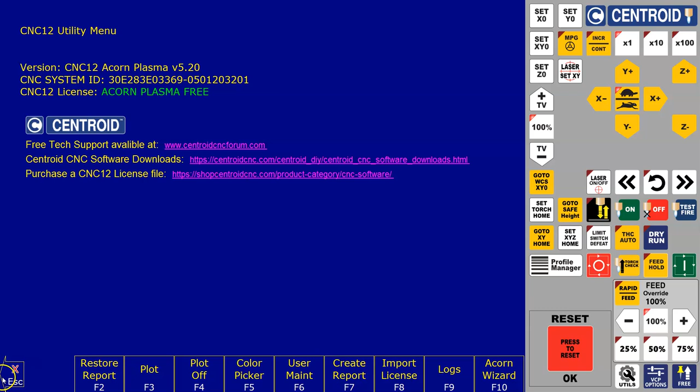These latest updates will be available in 5.2 or newer software versions. I'll go to my F7 utility menu. You can see I'm running Acorn Plasma 5.2, so this is CNC12 version 5.2. This is not only Acorn, but any CNC12 Plasma version will have this updated restart mode - that's Acorn, Acorn 6, Hickory. Anything CNC12 Plasma will have this updated restart mode. So let's get to it.

Let's go ahead and load our job. First job I'm going to run will be the Centroid Plasma logo, 20 inches by 4 inches.

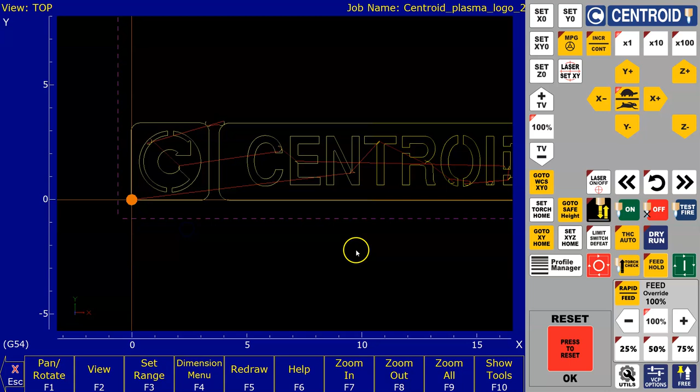We can check out the job in the F8 graph job menu. I can click and drag with the mouse, use the scroll wheel to zoom out. And what we see here is the purple dashed line are my soft limits.

So you could say that the soft limits are based off of my machine coordinate. And then we can see the orange crosshair is my actual torch location at the moment. I just set my work coordinate 0, so if I actually jog the torch off, we can see the work coordinate there. The work coordinate is the white crosshair, and that is where the job is based off of the work coordinate.

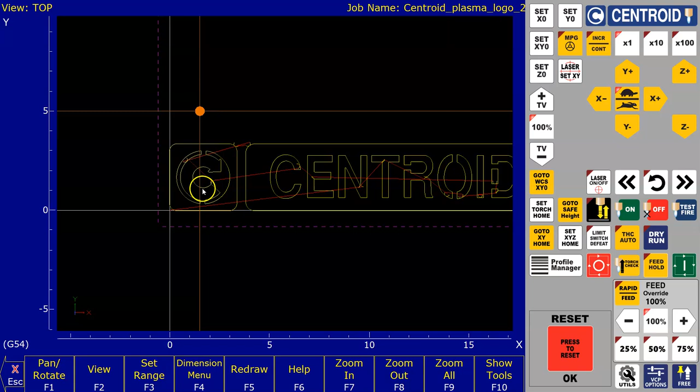So we can see our Centroid logo job there, and that's what we'll be testing and demonstrating the latest restart mode features with. So let's get to it.

First thing I'll show is, let's say you bring in a job and you just want to jump ahead, jump to a different part of a big nested job, and you just want to do a specific part in the job. What we can do is we can go directly into restart mode.

All we did was load our job, and we'll just press the center restart mode button. This is the restart mode button - when it's highlighted blue, that means you're in restart mode. And to get into restart mode, all we have to do is select this center restart mode button.

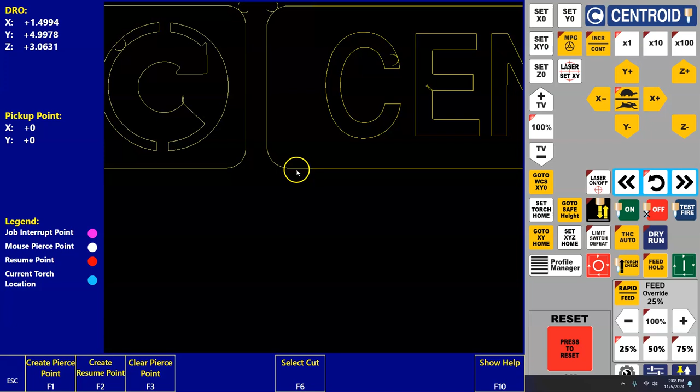Alright, so we're in restart mode. Mouse has the same control as the graph menu - I can click and drag, zoom in and out. This comes in handy for a big nested job; we can get right in on the part that we're looking for in the job.

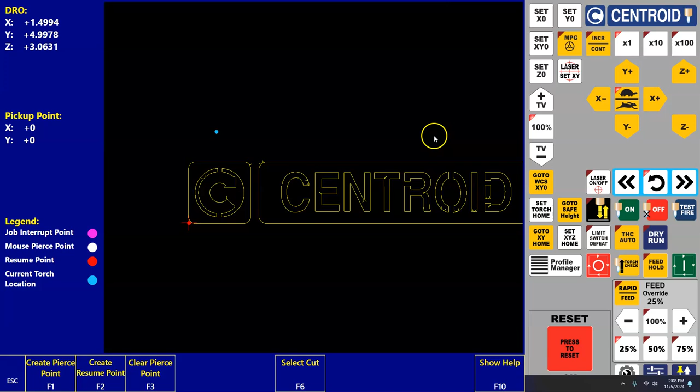And so we want to jump ahead, right? Let's say I'm not really worried about the Centroid part of this job, I just want the logo. So what I can do is I can press Select Cut, F6.

And what that does is any cut underneath the mouse, or closest to the mouse, will highlight white. And we can see that the different cuts in the logo are highlighting white.

And if I double click, a resume point will drop at the beginning of that cut, at the pierce point. So the resume point is the point at which we want to resume the job. And so we see I selected the outside of the cut - the red resume point drops at the pierce point of that cut.

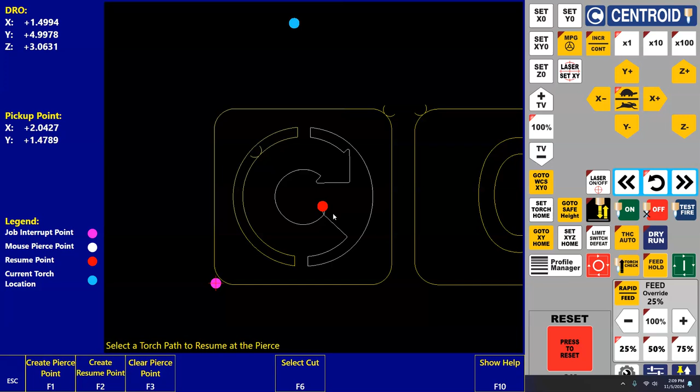Same for this side of the logo - resume point is dropping at the pierce point. And same for this side. So I'll just double click here, and let's say we just want to jump here in the job and start cutting this logo. All we have to do is press cycle start.

And there we go, we are running the job. So I'll bail out.

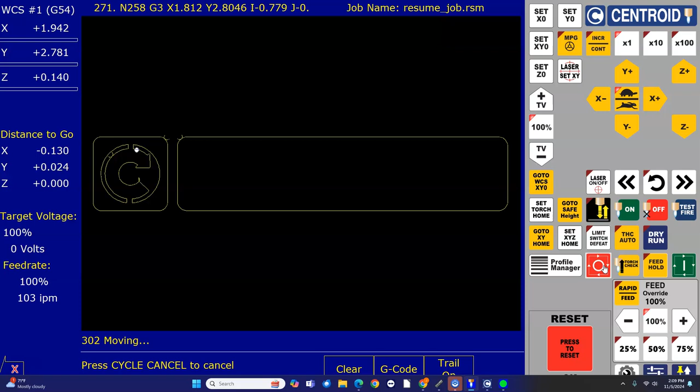I can go right back into restart mode. And the restart mode now, because we are actually running the job when I stop, it shows where we last interrupted the job, or where we stopped at.

The purple is the interruption point. So when I press cycle cancel, that was the purple dot when it dropped. And then it actually decelerated to a stop - the torch did, past the interruption point. So hence why the blue dot, which is our current torch location, kind of moved just past the interruption point.

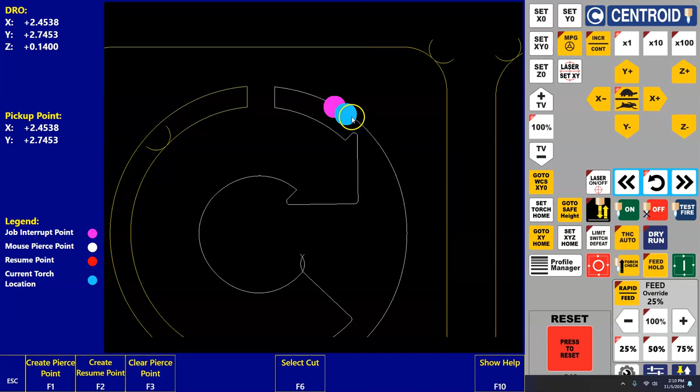So that means you can use restart mode even if you cycle cancel, something happens, bail out of the job, we can get right back into it and it remembers where we were last cutting at. So let's say we bailed out of the job for whatever reason, we're back in restart mode, and I do want to resume the job exactly where I pressed cycle cancel at when we were previously cutting.

So now we know we're in restart mode. We see the restart mode buttons are highlighted blue. You can also see those F commands in restart mode. I can now use the traverse button to traverse backwards.

So I'll click that. And actually my jog rate is extremely fast right now, so I can just turn down the feed rate. This is going to slow down the speed at which I'm traversing, which is based off of our jog rate. So I'll traverse the torch back forward to the interruption point.

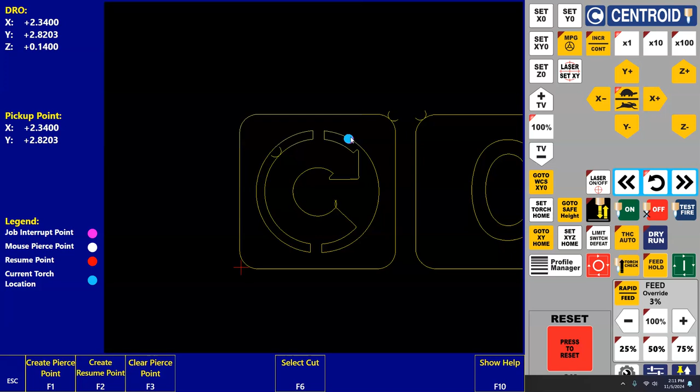And I'll get that blue dot pretty close to the interruption point. Let's just say I'm looking at the table. I see the torch is right above where I stopped cutting at and where I would like to resume cutting at on the torch path. So I'll just zoom in here.

Now what we want to do is I could just light the torch here and continue motion. That means it's going to light the torch at a stop and immediately start moving along the torch path, but it's going to be, of course, a slower feed rate, starting movement from a stop. And our kerf width might be a little bit bigger.

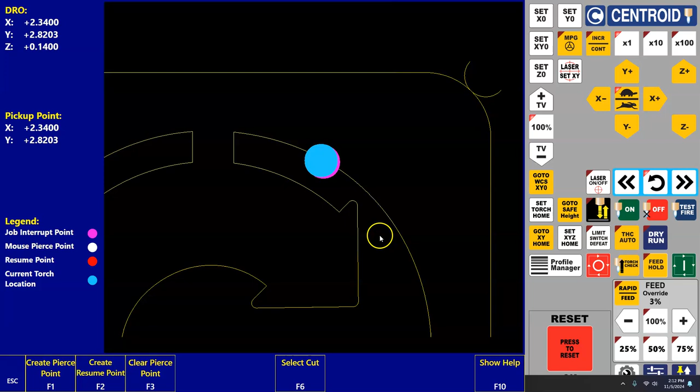One way we can solve that is by putting a lead in to resume the job, a lead in to build speed before the torch resumes on the cut path. So we've got a couple different ways of doing that. We can use the F command and just use the mouse for this. I'll demonstrate that.

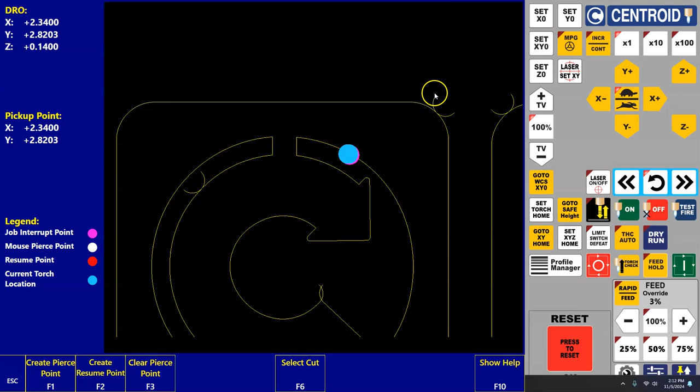So we want to put a resume point where our torch is. The resume point, just like before, where the resume point dropped at the pierce, we want to resume on the cut path right here. So we're going to put a resume point here.

So I'll select F2, create resume point. I'll double click right on the dot. And we can barely see, but under there is our resume point.

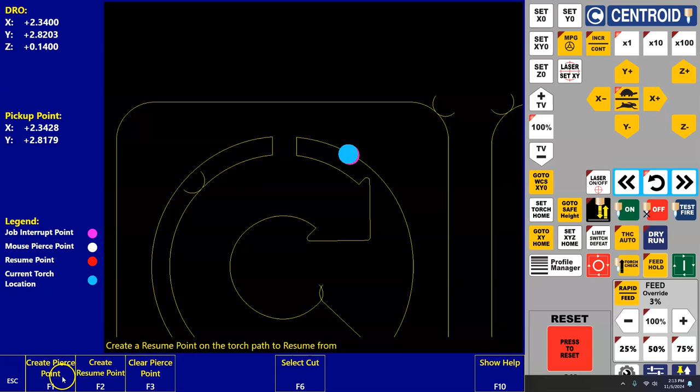And now let's select a pierce point. So I'll press F3, select pierce point. Oh, that's clear pierce point. F1, create pierce point. And I know I'm going clockwise direction, so I'm going to put my pierce right here in the scrap.

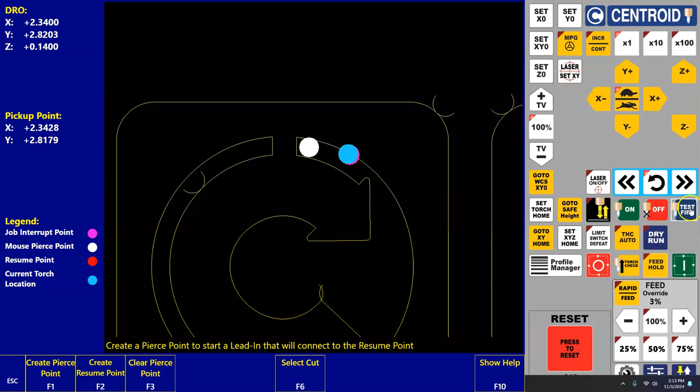So at the center of this white dot, the torch is going to pierce here and then make a straight line to our resume point, which we know and just put over here. So we can demonstrate that. I'll press cycle start. And there you can see the little flat of the lead in there before it re-enters on the resume.

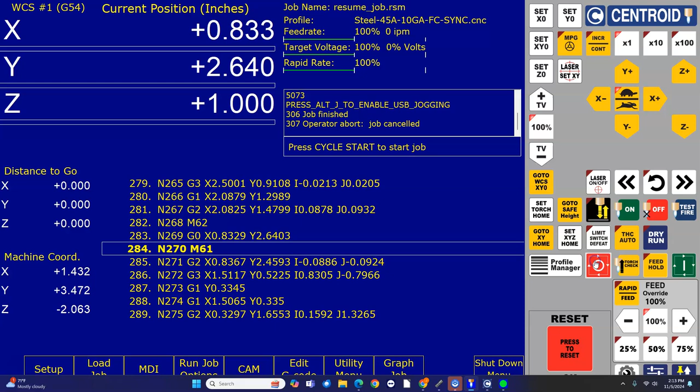So we're going to go right back into restart mode. Alright, so I interrupted that job in a rapid. It pretty much made it to the pierce of this next cut.

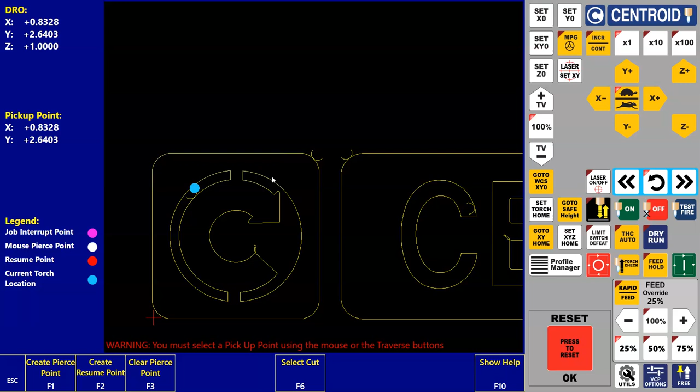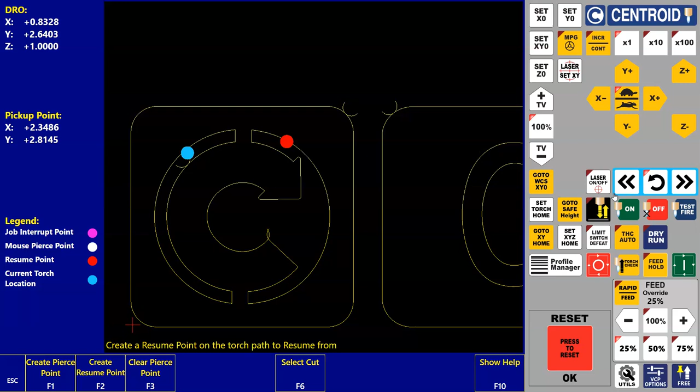But let's say we don't have the interruption point here. Let's say nothing happened since our last resume, and let's say I still interrupted over here. What I can do to actually move the torch back onto that torch path, instead of having to traverse, reverse, and go back to the end of this cut and then reverse back up, all I have to do is drop a resume point on the torch path over here and use the traverse buttons to then move the torch onto the torch path where the resume point was.

I'll move it a little bit further over. And so now we're kind of back on the torch path where our old resume point was and where we recovered last time.

But now I'm going to demonstrate a different way of recovering, and we're going to use the traverse buttons again. I'm going to slow that feed rate down and traverse to where I'd like to resume the job, which was right in here somewhere. Instead of dropping a resume point where I want to resume on the torch path and then creating a pierce point with the mouse, I'm going to just do that via jogging and the traverse buttons.

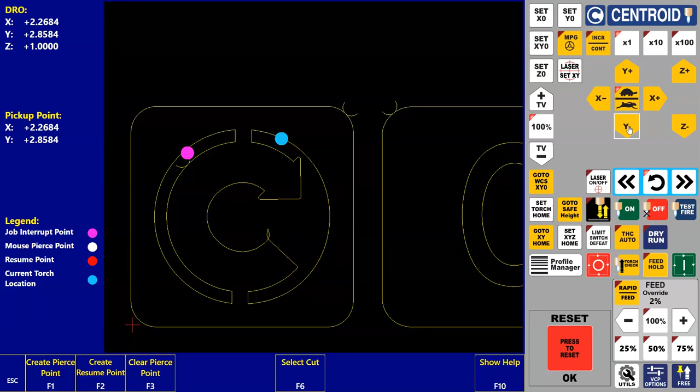So I've already moved the torch where I'd like to resume on the torch path. Now I'm going to create a lead-in. But to do that, all I need to do is jog the torch to where I would like the pierce to begin.

So as soon as I jog off the torch path, it's going to drop the resume point there. And now all I'm doing is jogging the torch to where I would like it to pierce and then resume the torch path at the resume point.

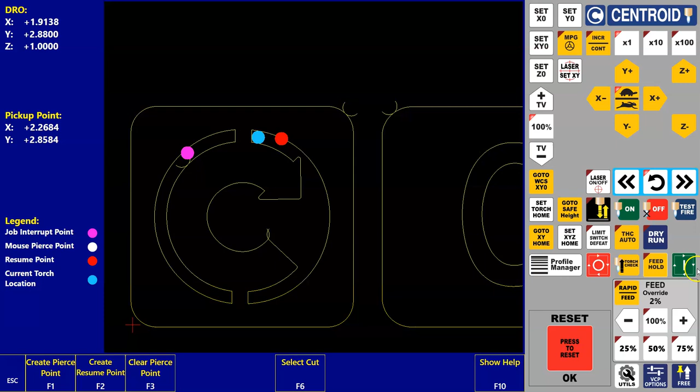So I'll put the torch right here where I would like it to pierce. It's going to connect straight to the resume point and continue on the torch path. All I have to do is press cycle start. And once again, there's our flat lead-in and resuming on the torch path.

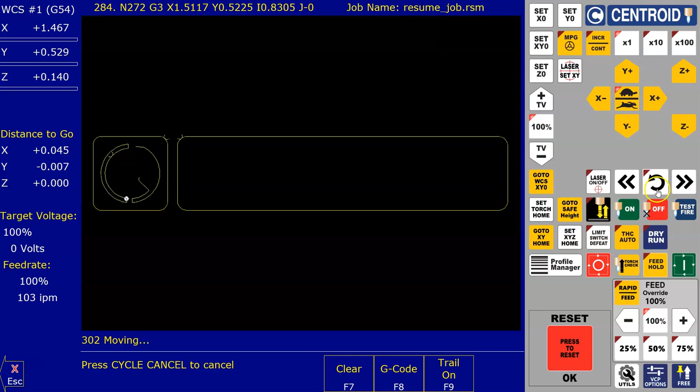So I'm going to demonstrate a interruption to the job by pressing cycle cancel. If you have an interruption to the job, say you had a flame out, your Hypertherm or your plasma cutter has an error, consumables, air pressure, whatever it is, maybe you had a tip up, a piece of metal came up and tripped the breakaway. When that job interruption happens, CNC12 immediately goes into restart mode.

So that's what I just demonstrated. We were moving along the cut path and I just went right into restart mode.

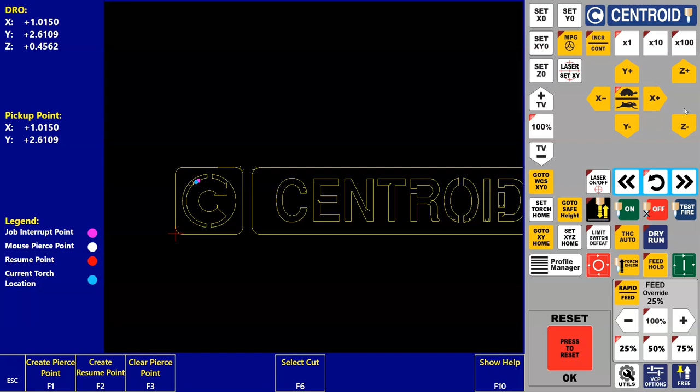Now you might want to check your consumables or your torch. You can jog the torch up. Maybe it's tripped on a piece of metal and the breakaway's tripped, so we're going to jog it up to untrip it. And maybe you're not sure what happened and you want to check the consumables without leaving the job. We can just hit torch check here.

And when I press torch check, there's a couple different ways that we can do torch check. Right now, I'm just going to manually jog my torch back to me so I can check the consumables, and then by pressing torch check again, that will send the torch back to where it was when I first selected torch check. You can also, in the wizard, set your G28 to any machine coordinate.

So torch check uses G28, and right now I don't have a G28 coordinate saved, but I could have any machine coordinate saved as my G28 position. So maybe that's closest to me, and when I hit torch check and jog the Z up out of the way to make sure it's clear and safe, and press cycle start, it will send the torch to my pre-selected G28 torch check position. But I'm not really set up for that right now.

So what I'll do is I'll just manually jog the Z up, make sure it's safe and it's not going to run into any material, and then I will jog the torch to me. So that's what I'm doing now. Of course, I have a soft limit here, so that's as far as I'm able to go. So I'm just going to jog the torch back to 0, 0, say that's closest to me.

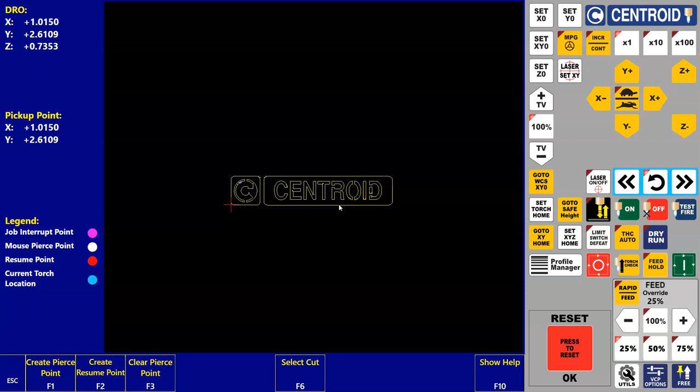Alright, so those are the different ways that we can jump ahead and create a lead-in and resume the job with restart mode. Thanks for checking it out.